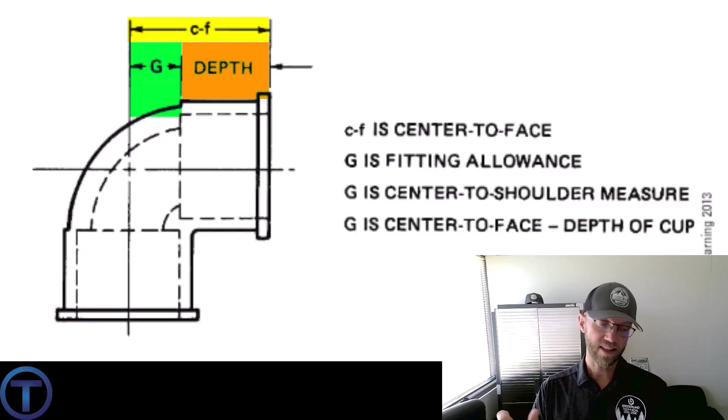To get our fitting allowance, which is G, we need to subtract the depth. That is how far the pipe pushes into the fitting and stops. So that's a basic explanation of the fitting allowance, right? And that is what we will be subtracting in our exercises today. As we are doing our sample problem and exercises today, remember to keep a finger or a marker in data table 5 and 6 in the appendix. We'll be referring to those, and notice that we'll be dealing with the PVC takeoffs or the fitting allowances. These are in the columns on the far right side below the images of the PVC fittings.

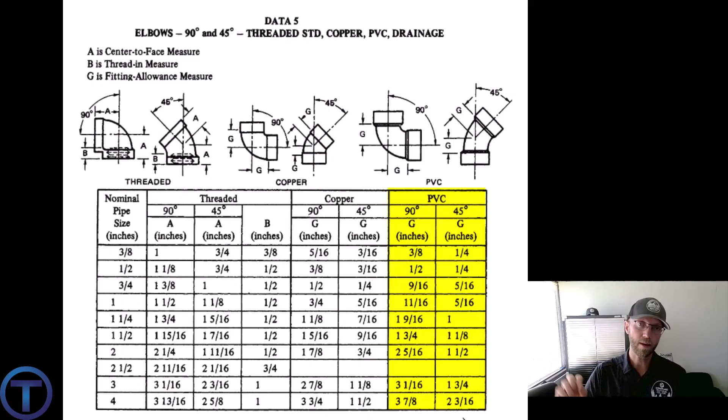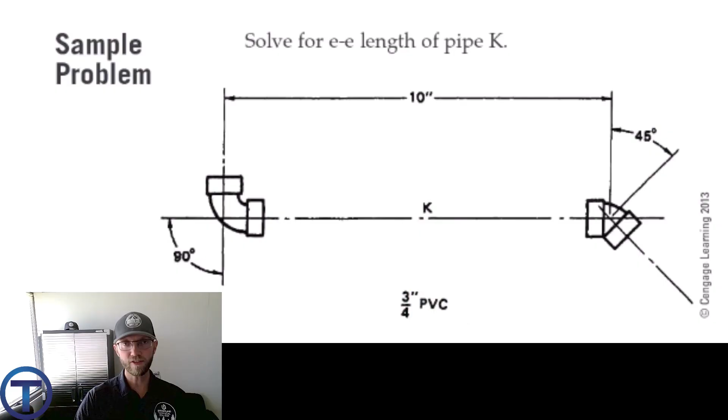Now again, we are told the type of pipe and the size. Here at the bottom we have 3/4 inch PVC pipe. We're going to take that information to data table 5, and on data table 5 in the appendix we're going to go down to the 3/4 inch pipe size line. We come to that, we follow that row across to where we have the PVC columns.

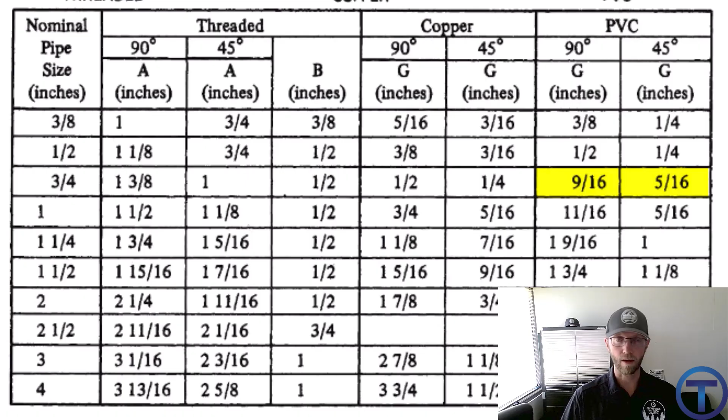Let's look at the PVC 90s. And the fitting allowance for a PVC 90 3/4 inch is going to be 9/16 of an inch. That's what we'll subtract for the 90. Let's look at the 45. We're on the same row, but we look over here in this column, and we've got 5/16 of an inch is the fitting allowance for a 3/4 inch PVC 45. That's the information we need. We'll subtract both of those off of our center to center measurement.

That brings us to step 3 of our sample problem as we're solving this. It says find end-to-end measure. The end-to-end equals center to center. That's the total fitting allowance. They messed up on this again. I can see that. They forgot to put the subtraction. Oh, skip that line. Let's go to the next one.

End to end equals 10. 10 inches was given to us as the center to center measurement. We are going to subtract the two fitting allowances. So we see in parentheses 9/16 plus 5/16. That was the fitting allowance for the 90 and the 45. On the next line, we have end to end equals 10, our center to center measurement, minus 7/8.

We get that from the fact that 9/16 plus 5/16 equals 14/16. And we can simplify that. You take 2 out of the top, 2 out of the bottom. 14 divided by 2 is 7. 16 divided by 2 is 8. That's how we simplify this fraction into 7/8. So we have 10 minus 7/8 of an inch. Our end-to-end measurement, this is the measurement we would cut, is 9 1/8 of an inch.

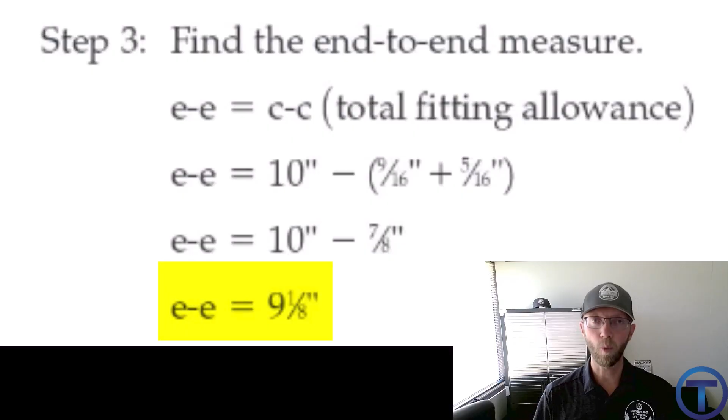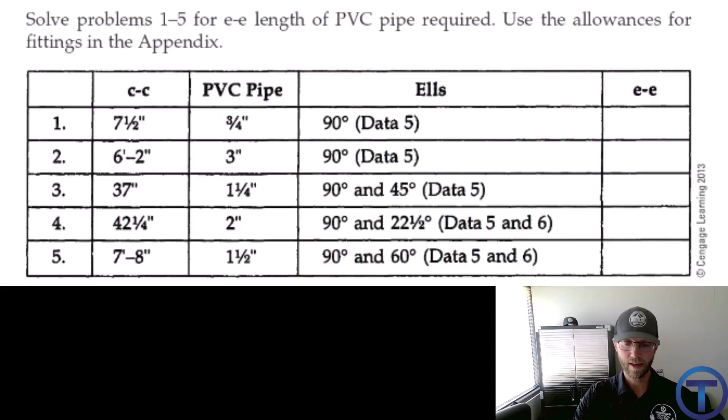The fourth column there is going to give you the elbows. Once again, numbers 1 and 2 say 90. Remember to put a 90 on both sides of that pipe and subtract twice. Finally, you'll get your end-to-end measurements. That's the answer you're going for. Ultimately, these exercises are intended to emphasize to you and I the importance of subtracting for fittings as we are cutting our pipes so that we can get our pipes to install exactly how we want them when we're doing offsets or whatever we're piping. This way we can make sure that they are installed professionally.

One other note there, as emphasized in this unit, make sure that you are always measuring the fittings you actually have in hand at the job. Don't be turning to any data tables here if you're out there on the job. You want to be using what you have because that is going to be exact. Good luck subtracting fitting allowances. Make that a personal habit for your entire career.